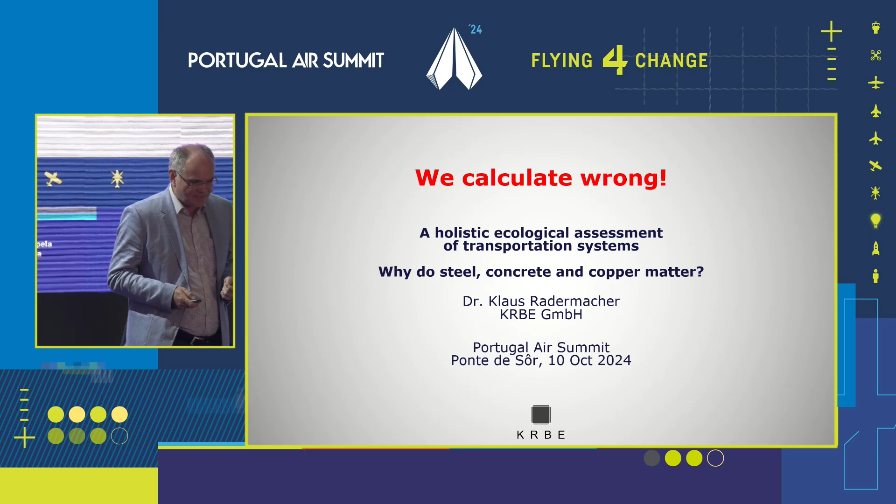Anyway, we calculate wrong. That's my main statement. We calculate wrong because if we don't assess mobility systems holistically, we're not getting the right impression. Why is that? There are 4 mobility systems, no more than that: railway, road, aviation, and shipping. It's all over the world, everywhere. And when we talk about the ecological footprint, in particular carbon dioxide, CO2, we almost always only look at the drive energy for the vehicle, what comes out of the tailpipe. And this is why everybody says taking the train is eco-friendly and flying is bad.

But that is not true if you look at the systems completely, because what you see here on this matrix is that each and every of the mobility systems requires its own infrastructure. It requires a vehicle, it requires drive energy, that's what we're looking at all over, but then we require a node infrastructure, we require a path infrastructure, and we require a control infrastructure. And all of these infrastructure components are completely incompatible. They're very specific to the very specific system. And that is not taken into account when we assess that and when we speak about carbon footprint.

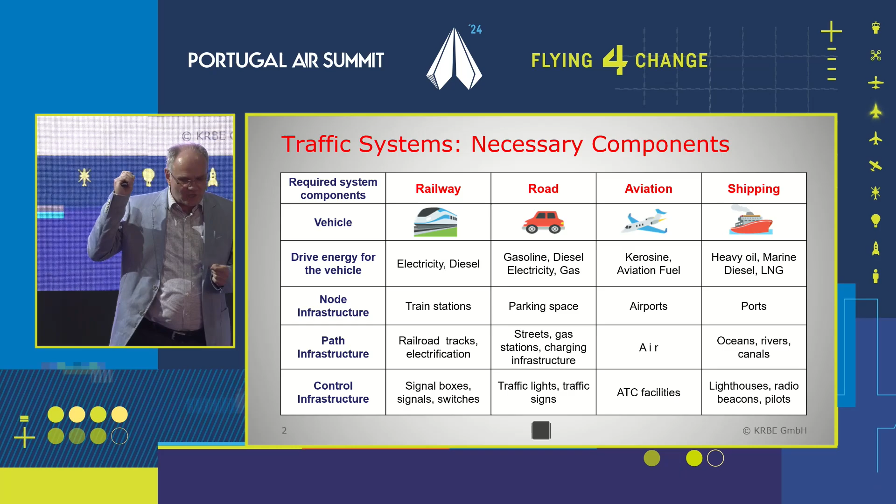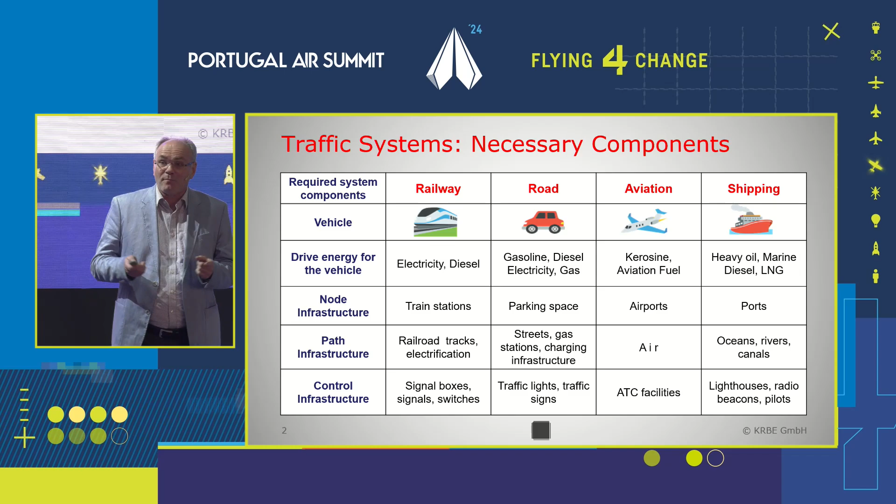One of the things I'd like to point out on this chart is, if you look at the path infrastructure for aviation, it is air. The air never has to be built, and it does not have to be maintained. There is no maintenance required. That's completely different from roads and completely different from railroad tracks. Same is true for international shipping. If we look at infrastructure, we see there are tons, massive tons of steel, concrete, copper, aluminum that are required for path and node infrastructure.

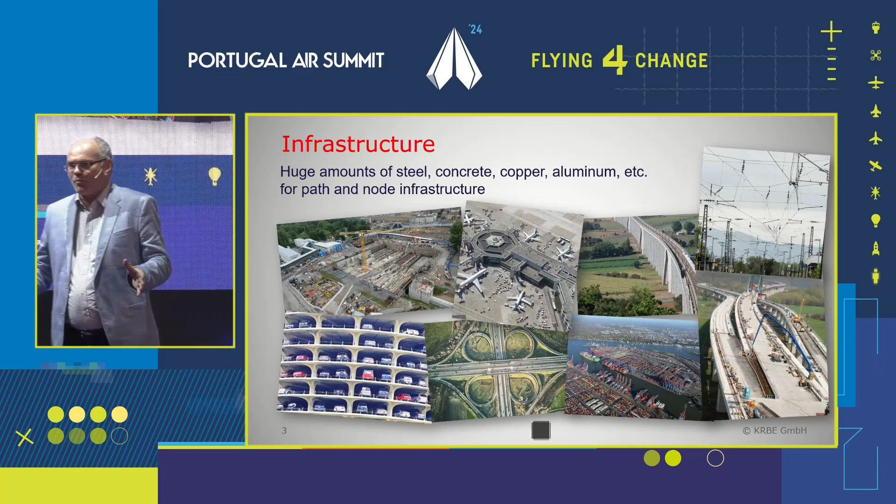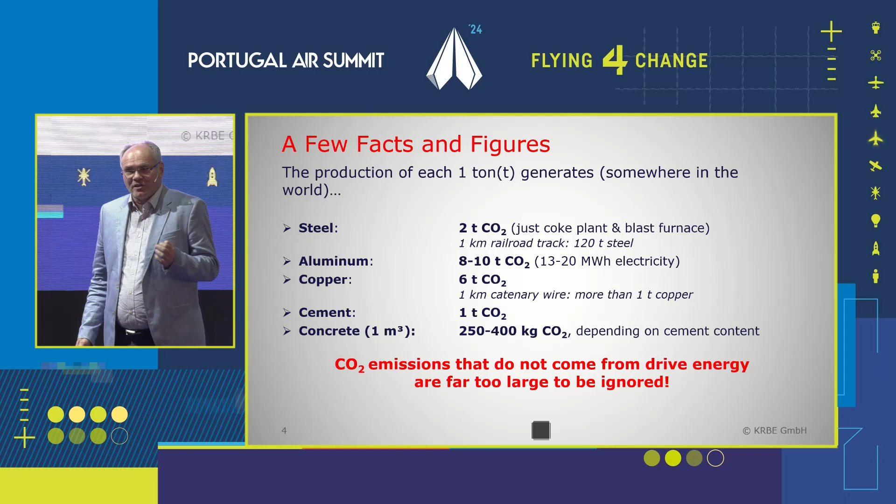No matter whether you look at airports or train stations, no matter whether you look at streets, highways, or railroad tracks. And if we look at the carbon footprint of the materials that are required to build this infrastructure - and I'm not going to read this to you, you can read it yourself - all I'm going to say, there are huge amounts of carbon dioxide that are already being emitted just getting the materials that are required for the infrastructure. So the CO2 emissions that do not come from drive energy are far too large to be ignored.

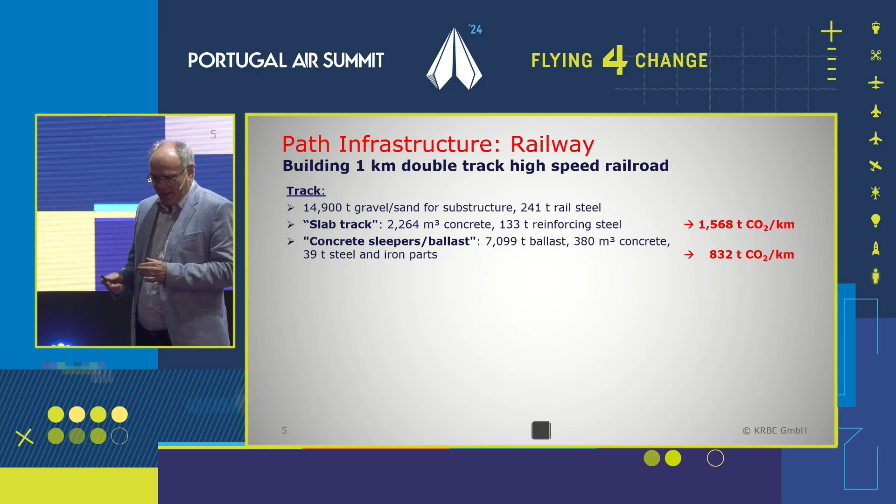Few examples. Everyone says taking the train is eco-friendly. But if you look at that, building 1 kilometer of double-track high-speed railroad requires just for the track - the steel in the track, the slab track, and so on, depending on what construction method you use - between 800 tons and almost 1,600 tons of CO2 per kilometer. But that's only the track.

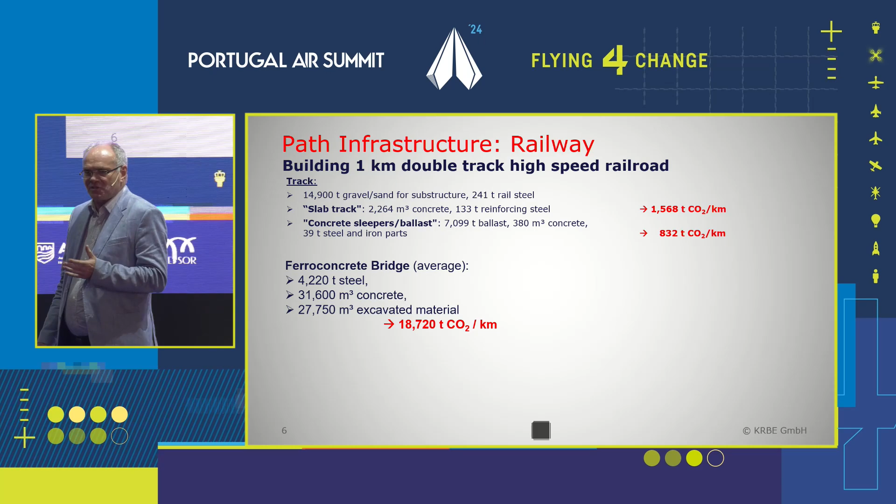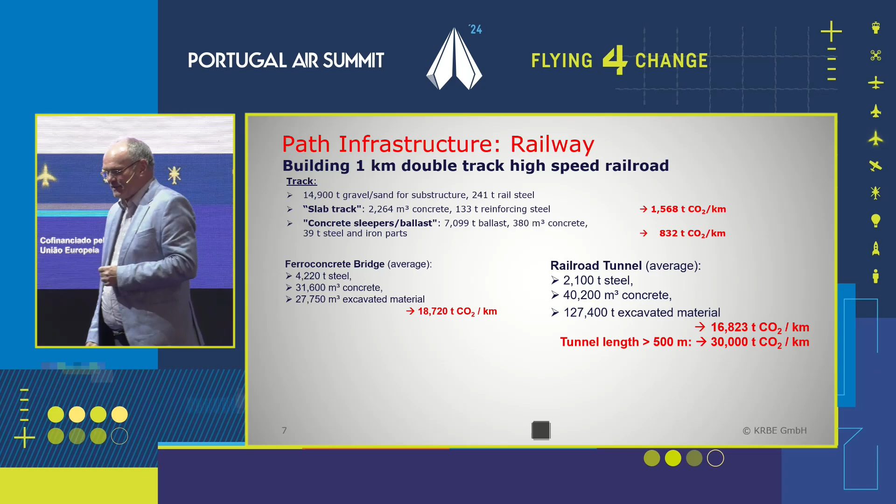The moment you have to cross a river, you need to build a bridge, which usually today is built of ferroconcrete - that's like armed concrete or reinforced concrete, concrete with a lot of steel in it. These are the numbers for 1 kilometer of railroad bridge. And it gets even worse with tunnels, because tunnels are built of a concrete shell with a lot of steel in it. So we're getting immense numbers.

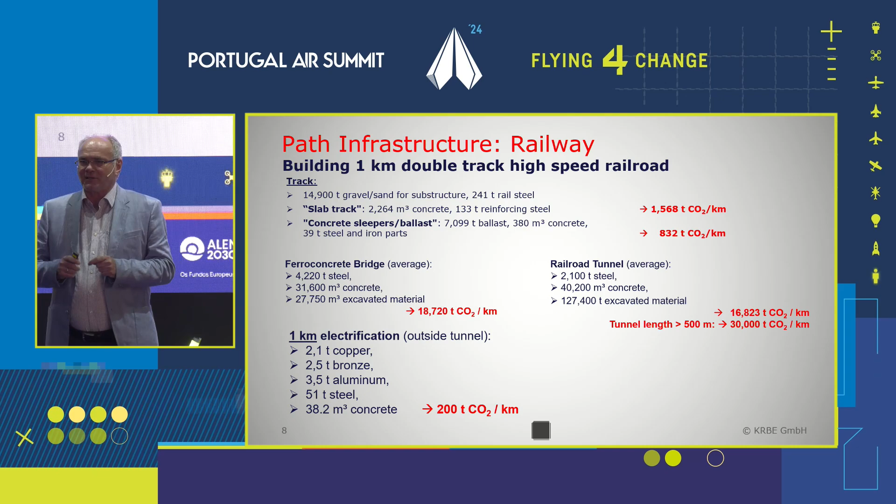And then we have the electrification, just that copper wire to get the electricity to the train engine. Copper is quite heavy. 1 kilometer of copper wire just to get electricity to the train is more than 1 ton of copper, more than 1,000 kilograms. I didn't make up these numbers. You don't have to believe me, that's what I always say. All this you can calculate yourself. I did the math, and you can do it the same way. So this is what we're looking at.

Now I'll give you one example. A fantastic piece of engineering is the Gotthard Base Tunnel in Switzerland. It's the longest railroad tunnel in the world, 50 plus kilometers in length. 3 tunnel tubes had to be built for that, 1 in each direction and an emergency one in the middle just for emergency cases. So they had to build 152 kilometers of tunnel tube just for a 50 plus kilometer piece of track underneath the Gotthard mountain.

And the fantastic thing is, did you know that the tunnel was closed for more than a year because they had an accident in one of the tunnel tubes? So no traffic was going through.

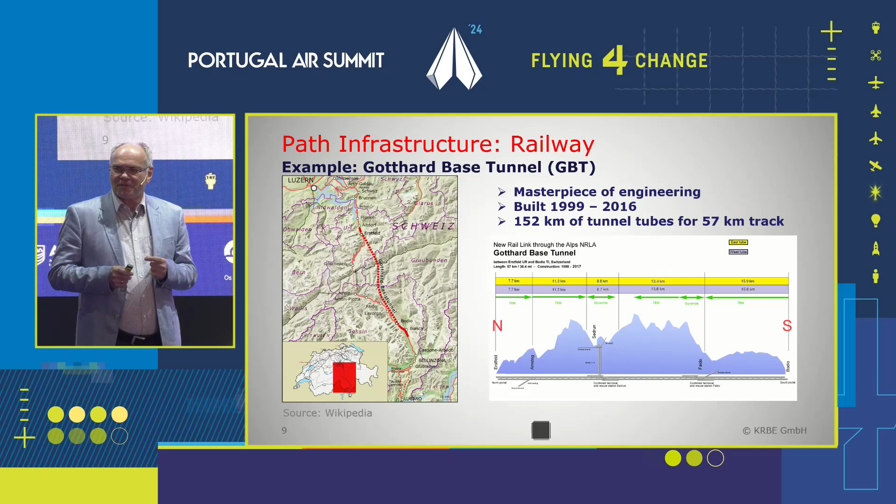But what I want to ask you is, do you have an idea of how much steel is built inside the Gotthard Base Tunnel? Let's compare it with the Eiffel Tower. One Eiffel Tower is about 10,100 tons of steel. Now, believe me, in the Gotthard Tunnel structure there is enough steel to build 21 Eiffel Towers.

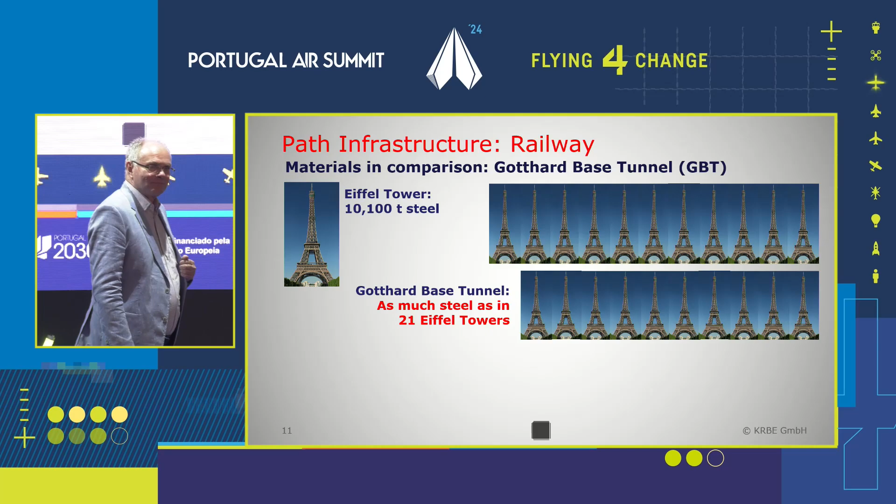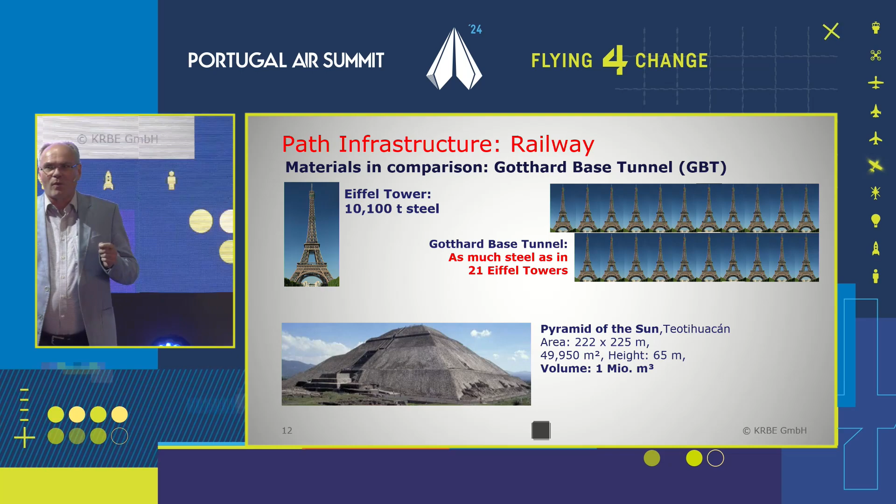And it's not only that. If we look at the amount of concrete, this is the 3rd largest pyramid in the world, the Pyramid of the Sun, Teotihuacan in Mexico. I like this example because it's almost exactly 1 million cubic meters in volume. The amount of concrete that went into the Gotthard Base Tunnel would fill 4.1 or 4.2 of these huge pyramids.

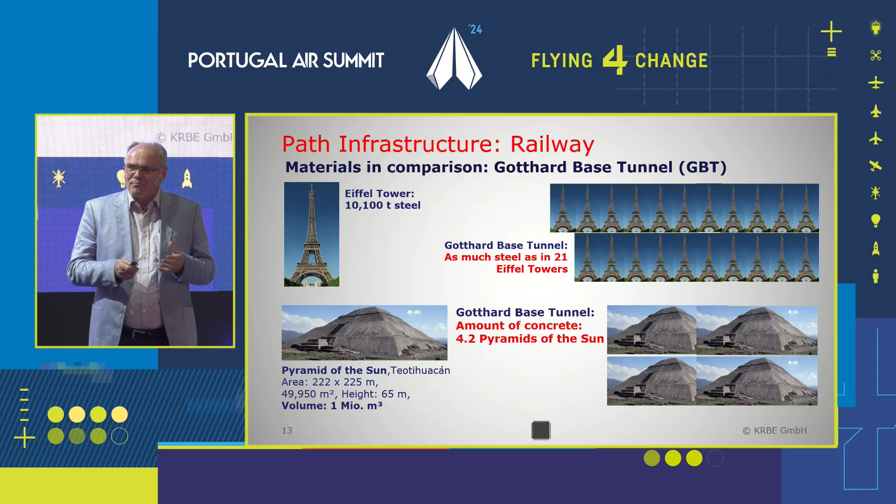And if we look at the excavated material, if you dig a tunnel through a mountain, there's a lot of soil and rock that needs to be taken out. How much do you think that would be in terms of Pyramids of the Sun, Pirámide del Sol in Mexico? It's about 28 million cubic meters of excavation material that had to be extracted from the mountain to build that railroad track. And this is not done with a sand shovel from the beach.

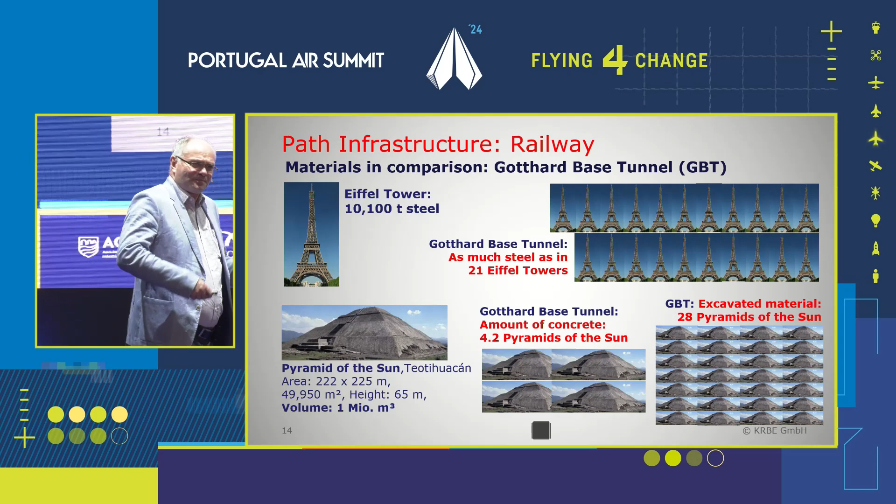And this is almost everywhere forgotten or not discussed when we talk about carbon dioxide emissions from traffic systems. Now there is another aspect when we look at mobility. Every form of mobility, whether I walk, take my bike, drive my car, or fly in an aircraft, all mobility is applied physics. There are certain rules, and I'm not going to make this a physics class, don't worry.

For those of you who would like to do the calculations at home, they're here on the slides. What I'd like you to understand is, no matter what you do, you need energy for acceleration, energy to overcome air drag, and energy to overcome gravity. That's what physicists call lifting power, lifting work. And the formulas are here.

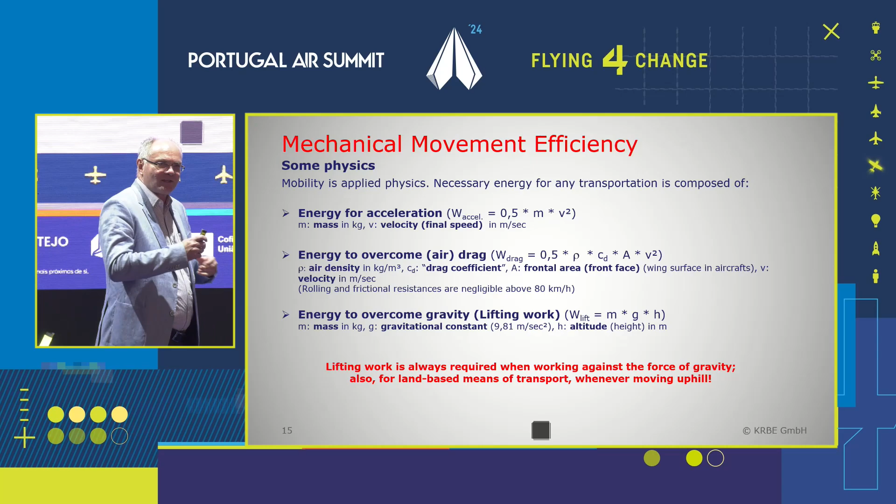The important thing is that when you move a little faster, the air drag supersedes all the other frictional resistances. In a car you still have friction with your wheels on the street; railroad trains have friction with their steel wheels too. We can ignore that as long as we're moving faster than 80 kilometers per hour.

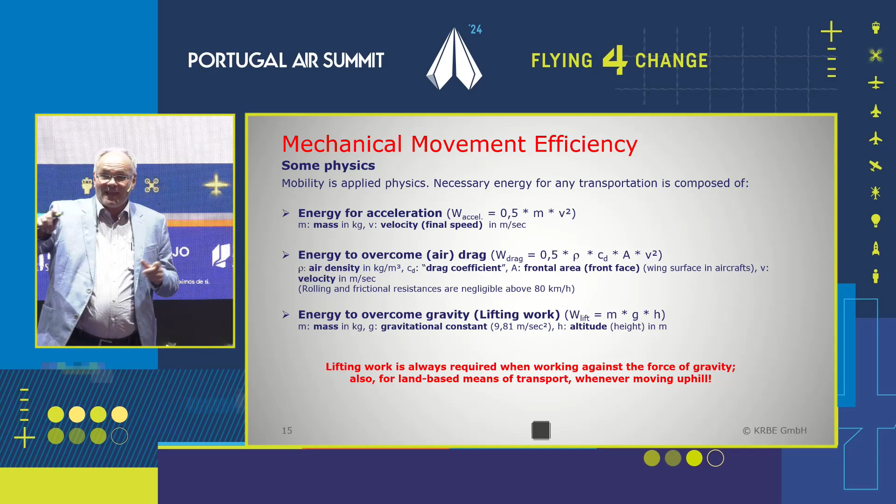The important thing, which many people do not understand, is that lifting work is not only required for aircraft. I've very often given presentations where people say lifting work is only for aircraft, because people see how an aircraft takes off from the ground. But that's not true. Whenever you go uphill with your car, or whenever a train goes uphill, you also have to perform lifting work. Very same formula.

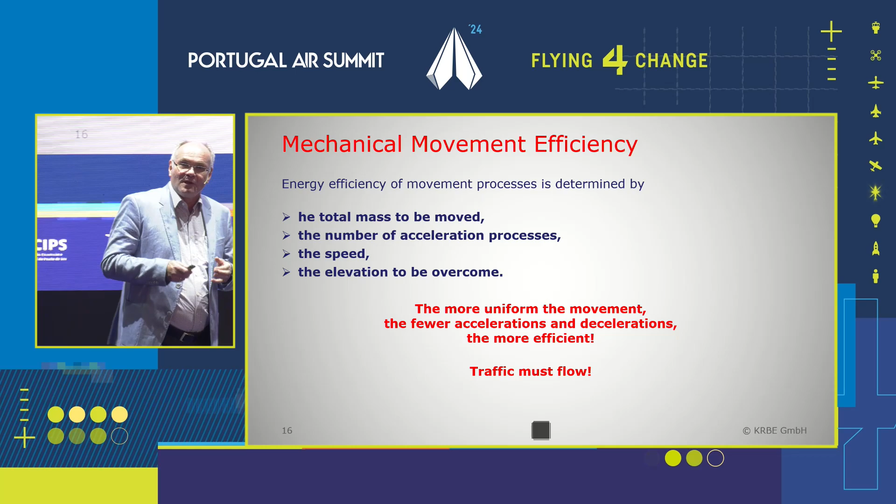Now, the important aspects in the end are: what is the overall mass to be moved, because that's important for the acceleration and the lifting work? What is the number of acceleration processes if you want to go from A to B, like from Frankfurt to Lisbon or from Munich to Lisbon? I just flew in from Munich to Lisbon this afternoon. What is the overall speed you're traveling with? That's important for the acceleration energy required and for the energy required for air drag.

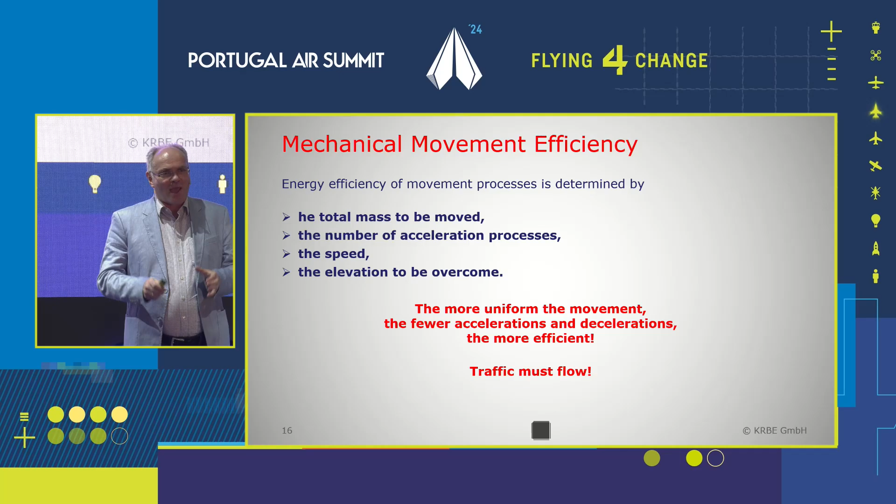And what is the overall elevation to be overcome? Bottom line: the more uniform the movement, the fewer accelerations and decelerations, the more efficient the process of movement. Traffic must flow. It's something that many politicians have not understood, because they very often try to do exactly the opposite when we take our cars in the cities. But from a physics perspective, the fewer stops you have, the fewer accelerations you have, the better the energy efficiency of the movement.

Now, if we compare train versus aircraft, these are examples I've calculated for Germany or Central Europe, with a little bit of Switzerland included. If you go from Hamburg to Zurich, or from Hamburg to Munich, or from Munich to Berlin by train, you have like 8, 9, or 14 stops in between. That means 14 times the train accelerates to like 270 or 290 kilometers per hour, and at the next station it stops to 0, and that happens again and again and again. And the air drag has to be calculated for each kilometer that you go.

Now look at the distance difference between train and aircraft.

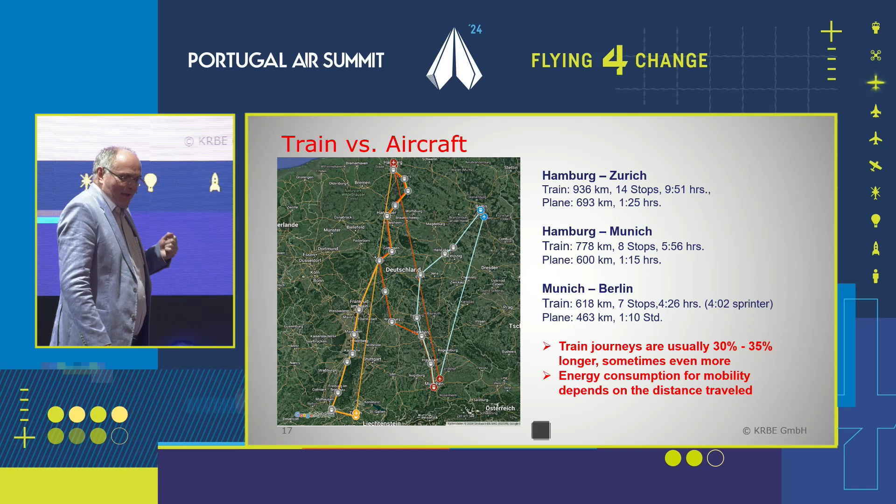This altogether means that the movement efficiency of trains is key, because trains are extremely heavy. An empty ICE train in Germany is more than 400 tons. With average utilization, that means 1.7 tons, or 1,700 kilograms, are moved and accelerated 7 or 8 times for each single passenger on a trip from Hamburg to Munich.

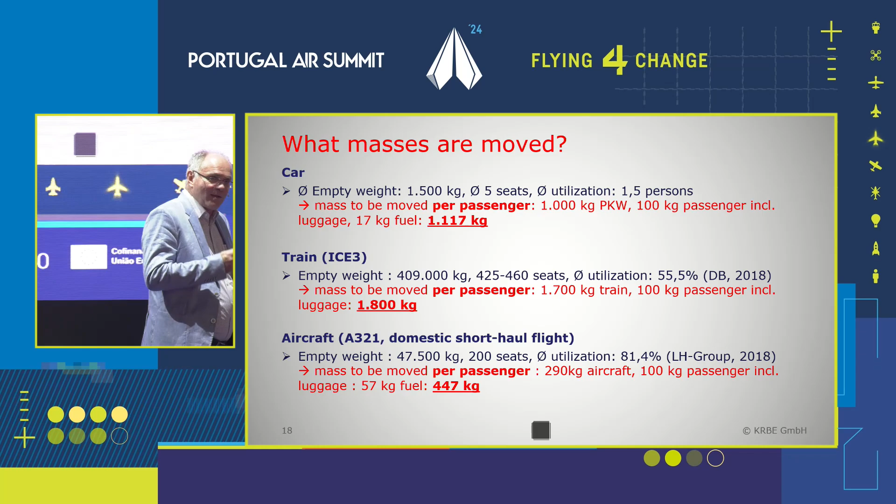So you have to take these things into account in order to come up with real numbers on how efficient mobility is and what energy is required. These are the energy calculations I did based on the formulas I had on the slide before, and that is really surprising.

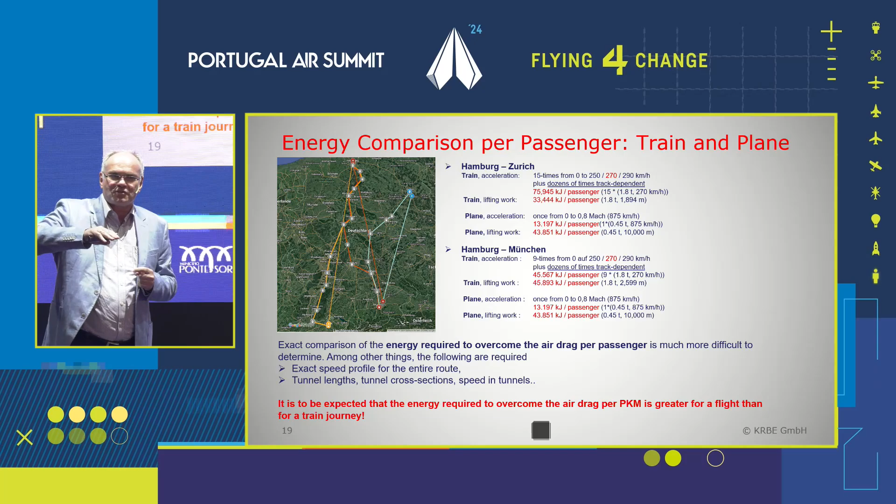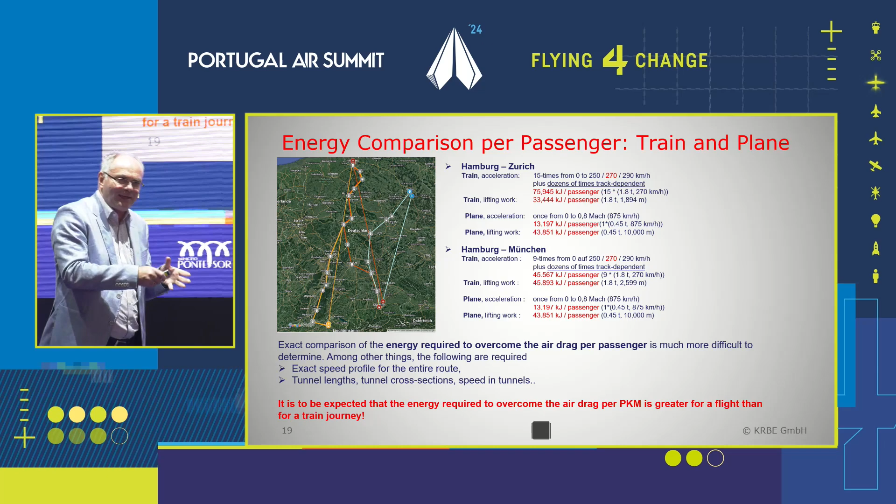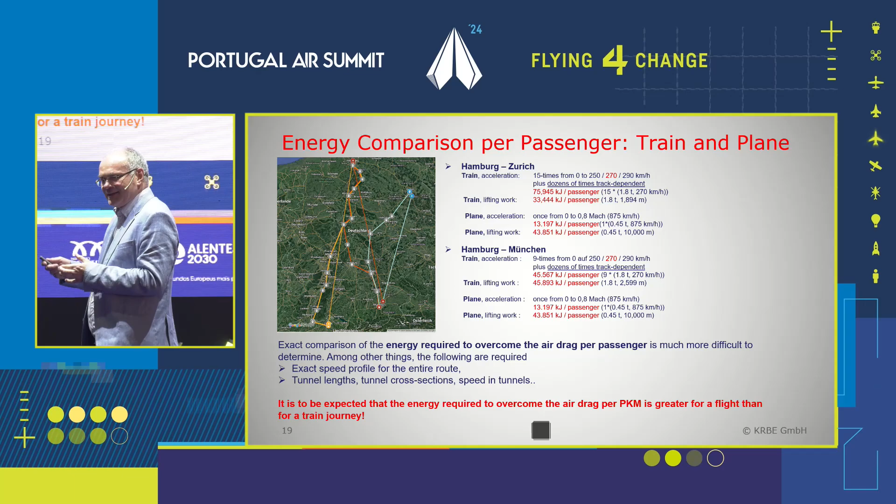The lifting work, because the train has to go up and down, not 10,000 meters like an aircraft, is much less — only about 1,894 meters on its way from Hamburg to Zurich. It goes up and down only a little bit. But because for every passenger we have a mass of 1.8 tons — 1,700 kilograms from the train plus 100 kilograms payload — the overall energy required in kilojoules is higher than if you do that with a plane, where you only move less than 500 kilograms per passenger. So much more thinking is required to understand the efficiency between train and plane travel.

Mobility solutions of the future — that is what I want to talk about, and that is what I want people to understand. You have to think holistically.

You have to think holistically when assessing carbon dioxide and other environmental aspects. Calculate, don't guess. It's not a matter of gut feeling — 'I think, I feel,' that's what I always hear. No, that doesn't work. Sorry.

Never forget the necessary infrastructure. Even if the infrastructure was built 10 years ago, there are millions of tons of carbon dioxide that still need to be attributed to the travel performance of today. Utilize the existing infrastructure — I always say that. It doesn't make sense at all not to use a road or a train track that has already been built. We will not get a single gram of carbon dioxide back into an imaginary bottle by not using train infrastructure or road infrastructure.

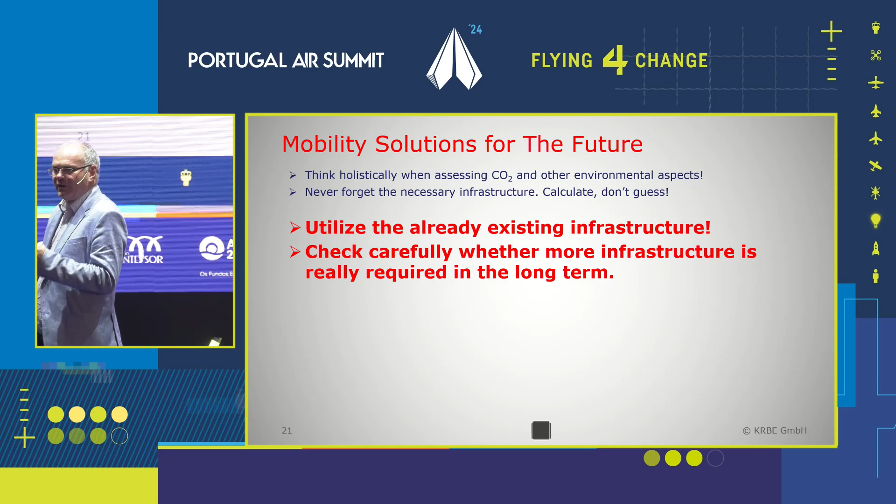But check very carefully — and this is what politicians don't do these days — check very carefully whether more infrastructure is really required in the long term, or whether we can do better with what we already have. Science and engineering aspects must be key for future mobility solutions. Ideology and emotions are not helpful. Can I repeat that? Ideology and emotions are not helpful.

Economic criteria must be considered just as holistically as ecological criteria. How much does it cost in the different systems to offer one passenger kilometer of transportation — in a train, in a plane, in a car? And then the question is, who pays for what part of it? What fraction is actually paid by the person who benefits from the traffic performance, and what is paid by the government, or let's say by the general public, us taxpayers?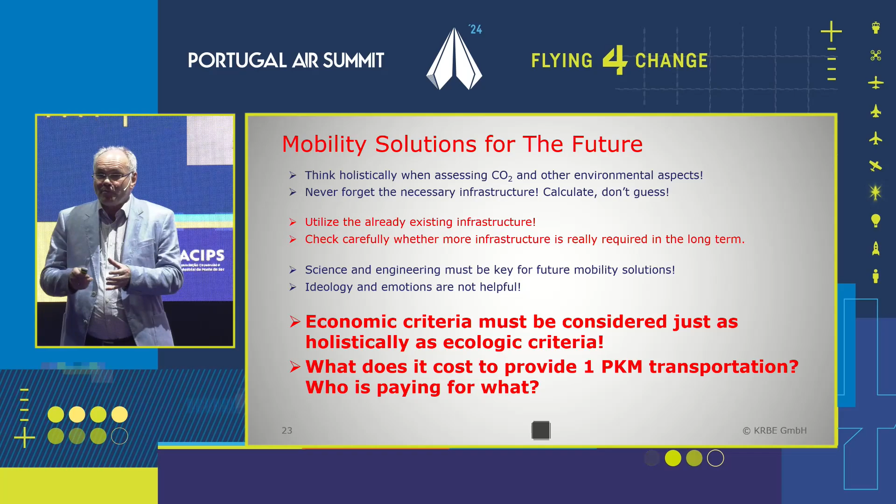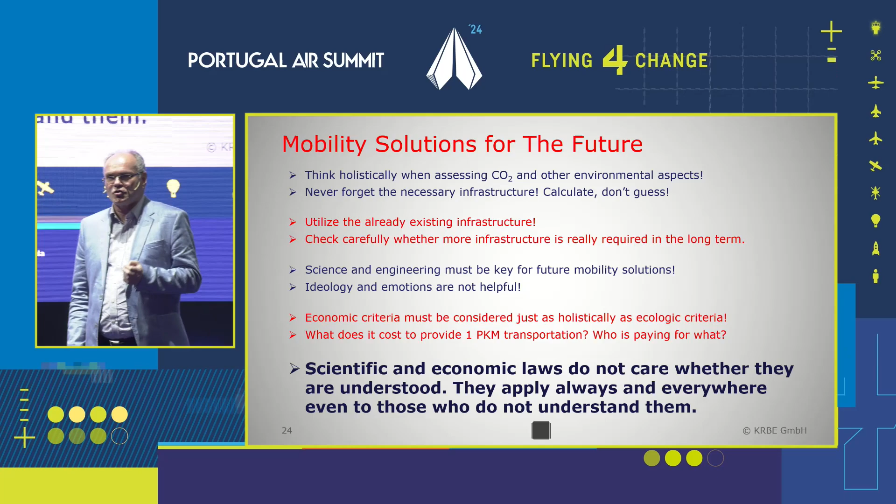Very important: scientific and economic laws do not care whether they are understood or not. They always apply everywhere on this planet, even to those who do not understand them. This is the message in the 15 minutes that I'd like to give to you. Thank you very much for your attention.